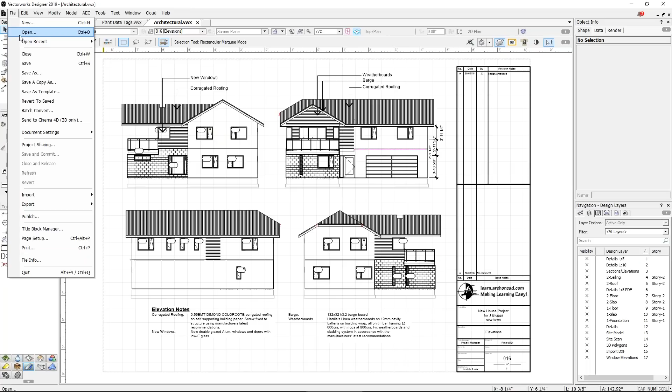So I'm going to talk about some of the best bits of Vectorworks 2019. I am not going to cover every new feature. There are some new features that are small, there are some bug fixes. I'm not going to cover the entertainment features, but I'm going to cover the features which I think are really quite powerful. And I'm also going to show you how to manage some of these new features. There's a new way of putting, for example, the tags on windows, and I'm going to show that to you, and I'm going to actually explain how you can take control of it as well.

But the first thing I wanted to talk about was the clip cube. Now, I hope everyone knows how to use the clip cube. We select a few things like this. I've got my clip cube here on my quick preferences. And if you haven't got it there already, it's this button over here, this arrow, and you choose Show Clip Cube. That will bring the clip cube preference up here to your quick preferences. When you activate the clip cube, it will put a clip cube around the selected objects.

So because I had the chair selected and these other things selected, it puts the cube, or the clip cube, around there. If I select the clip cube, I can then move it. I can change where it's going. I can also change the angle of it using these dots here. So don't forget, you can actually twist the clip cube to align with your building if you need to.

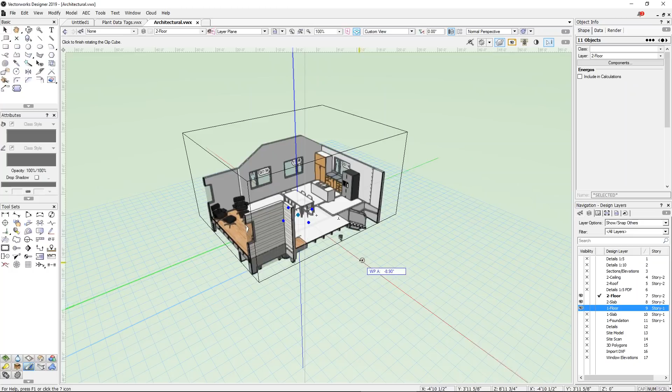And I want to bring that down so I can see my lower floor and turn on my lower floor as well. So I've got this view here, and I really like it, and I want to show the client because it's really important how the client will appreciate the room, the kitchen, the interaction, the organization between upstairs and downstairs. But when I try to make this into a viewport in Vectorworks 2018, it was actually very awkward.

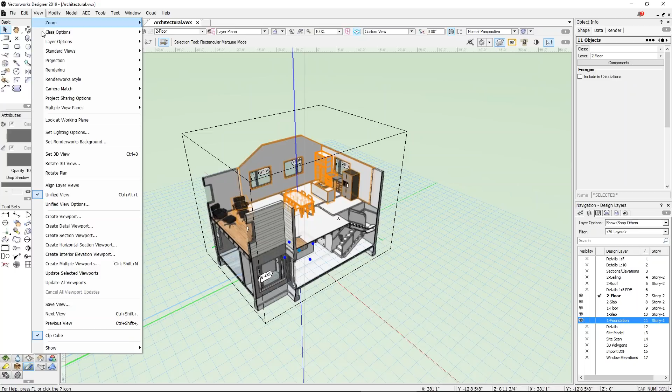In 2019, with that clip cube shown, I can go View, and I can choose Create Viewport, and Vectorworks will use that clip cube to help create my viewport. Now I have a layer already for this. Let's go OK, and there is my rendered view.

It's not actually rendered yet. So when I update that, you should notice the entire building disappears and we're just left with the bit that is the clip cube, which I thought was pretty cool.

I reckon this is going to be a fantastic way of helping clients understand what you're talking about with your spaces, because you can hide all the spaces except for the bits you really want to show.

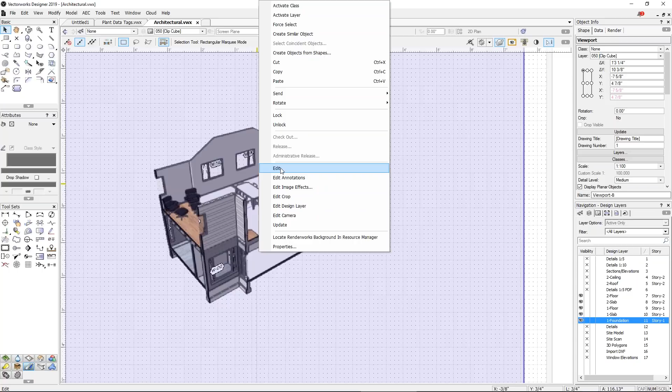If we right click and choose edit - normally I go straight to design layer, but I want to show you something on the dialog box. When I go to edit, this is the normal edit window, and for most people this turns up when they double click on a viewport. It doesn't for me, because I've changed this option here, since I quite often edit the annotations. So later on you'll see me jump in and out of viewports without bringing up this dialog box, because I've activated this option to edit the annotations.

Anyway, I want to edit the design layer, but first I want to activate this button here, navigate back to the viewport, and display it with the clip cube.

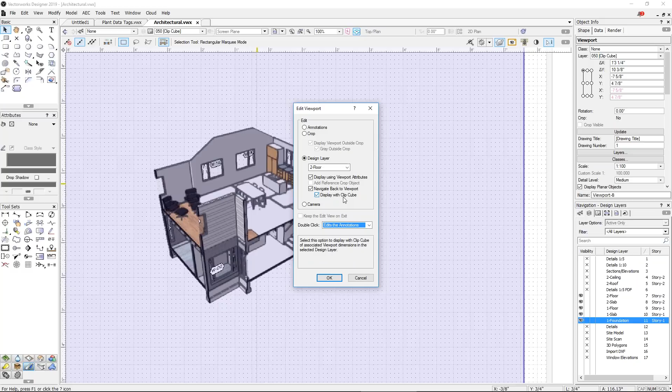OK, that takes us back to our design layer. There's our clip cube, and we've decided we'd like to show more of this end of the building so the client can appreciate how this is going to work. We're going to pull this down so the client can really see the indoor-outdoor flow.

Let's return to our viewport. Now I'm going to update that, and my view should update, and I should see my new revised clip cube.

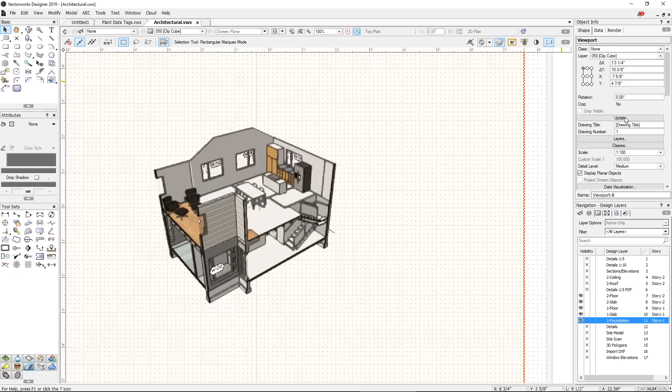This is a really nice way to avoid having to crop this viewport - the clip cube does a lot of that for you.

If you still want to crop the clip cube viewport, you can do that by going edit, crop, and then draw a shape that you might want. Let's draw a freehand shape, because we don't want to see the downstairs very much.

And there it is - you can still use the crop, but the clip cube does this three-dimensional cut, which is actually pretty cool.

Now, I think I've actually changed this on my computer. You might also notice that this is slightly fuzzy.

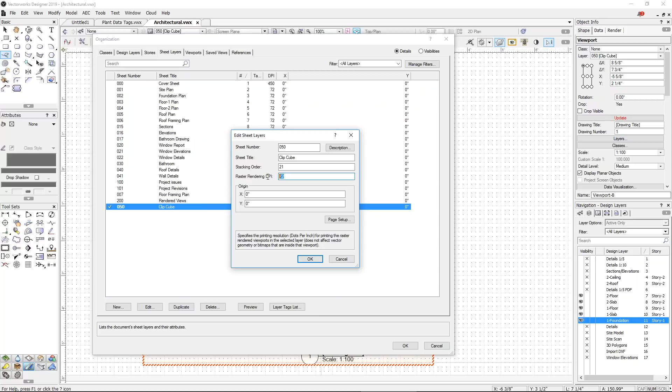The reason it's fuzzy is because when I set up my sheet layer, I didn't change the raster rendering. So if I make that 300, OK, and then update my view, you'll see that my rendered view comes out a lot crisper.

Just have to wait for that to finish. There it is - so it's a lot crisper.

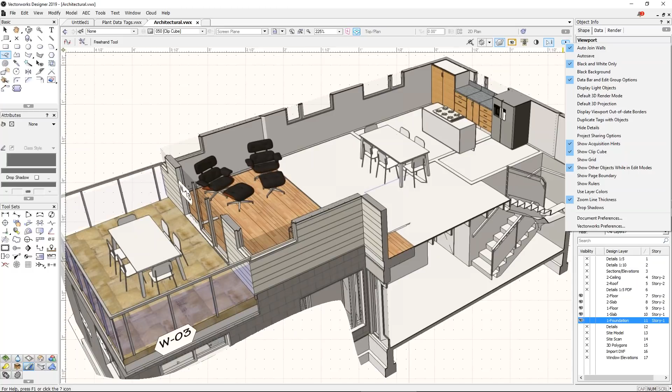Now, you might notice that my clip cube has the gray fill on all of my clip cube objects. Let's have a look at this - it's down here, Vectorworks Preferences, and we're looking for Interactive and Interactive Appearance settings.

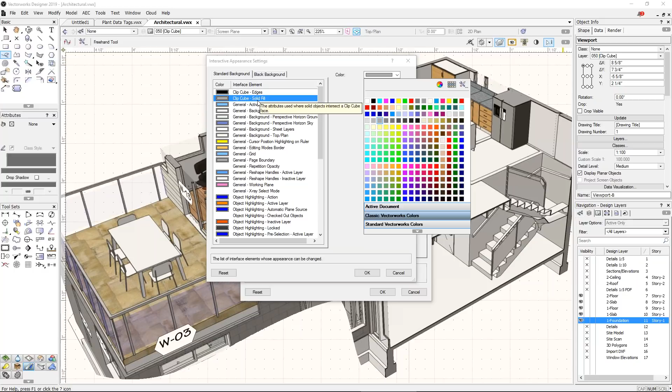So there's an interactive appearance setting which I've changed, this one here. This is normally a bright red color, so all of your clip cube edges are red, and I've changed it. It's one of those little subtle changes you forget is in there, but it lets me change my clip cube edges to a nice gray color instead of that rather bold red.

So I think this is a big improvement, this ability to create your clip cube viewport, which I think is pretty cool.

So let's go to something else that I want to cover.

This viewport here, I'm just going to do something to this. This is a viewport which I've set up - it's a rendered view. I've got two views of the same part of the building, and I'm going to turn off the image effects.

The image effects allow you to change the exposure, the color temperature, the shadows, and the highlights - the edges of your rendered view - much more easily.

So let's just have a look at changing this to a Renderworks style. I'm not sure if I've got a fast one. Exterior fast - maybe this one will do.

And we'll just update that, because this will work on several different rendering types. So let's get that one updated. You might notice it takes a little while to update.

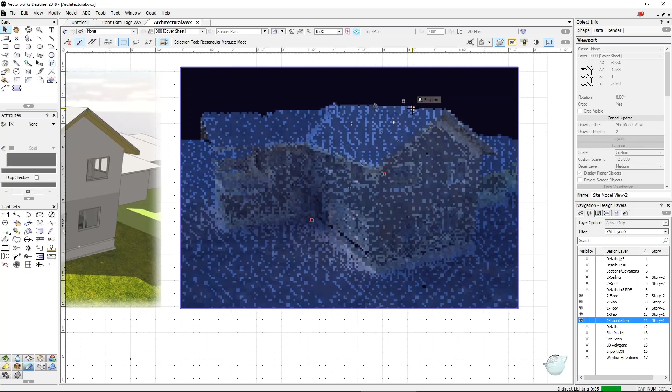Then if we wanted to change things like the color temperature, the exposure, or add more lights, we would normally have to go back to our design layer and add more lights to it. But what we tend to do is add more lights, come back to our viewport, and have another look - is that what we wanted?

Yes, no, go back to our design layer, change the lights, change the temperature of the lights. That's a lot of work, and you can waste an awful lot of time.

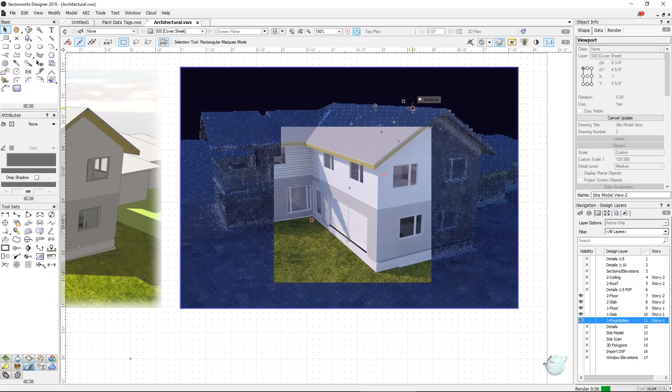So when this finishes, I'm going to show you how you can change this and make it much quicker. On my object info palette down here, there's an option to apply image effects. The image effects will allow us to change the exposure, and you'll see it's really, really quick. I'm just going to be quiet while we wait for that to finish. It's nearly done.

All right, Barbara, so it's getting there. I can't do anything until it finishes. This is my image effects button here. I know, but it looks okay, great.

So there we are. Let's have a look at our image effects. If I turn off the image effects, you can see there's a slight change. Let's turn that back on, and let's have a look at our image effects.

Now what I can do is play with my exposure, and it's instant. Play with the contrast, play with the highlights, play with the shadows, or I can reset and bring it back to normal.

So if I go reset and apply, that was the standard image effects. Then I can click on this again. I'd actually like to drop the exposure down a little bit to show a little bit more light and shade, and I want to have a bit more contrast.

I'd actually like to make it a little bit warmer, the color temperature. Or why don't we just make it black and white? Or increase the saturation so that the colors become much brighter.

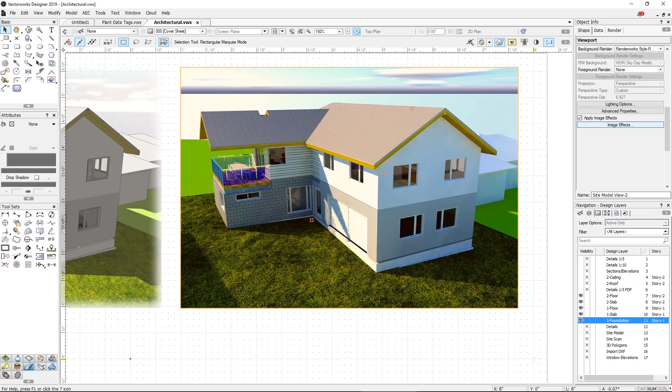You can see I don't need to update that viewport. That change is instant. It's not beautiful, I understand that, but it is instant, and it means you can quickly change your renders without going through the whole process of going back to the design layer, back to the render, back to the design layer, and so on.

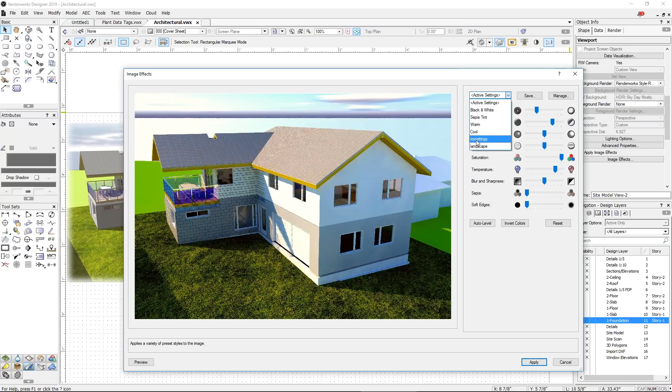These are also saved. So if I go back to image effects, I can save the setting. Here's one I created earlier, landscape, and apply that. So I've changed this.

Now this one, so there it is. It doesn't have to re-render, but that's a setting that I saved earlier. I can just choose it, and it's applied straight away to that.

Now those settings are not saved in the file. The settings are saved on your computer, probably in your user folder. I don't know for sure, but I suspect it's in your user folder, which means the settings you save on this computer will be different from the settings saved on another computer, unless you're using a shared area. But my guess is it's probably in the user folder, I just haven't looked at it.

But I thought that was pretty cool, that ability to have these rendered views and to change the color temperature. There's a huge difference between these two.

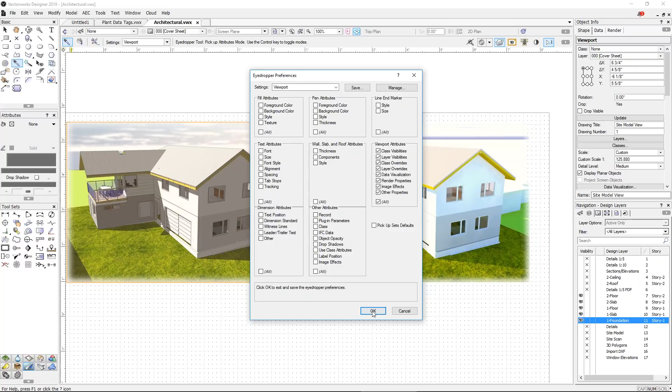I don't know if you noticed, but they actually did start out as exactly the same rendering, and I've just played with them. The Eyedropper tool now has the ability to suck up the image effects from one viewport and stick it onto another. So you can suck up that, stick it on that, and it should change those two viewports straight away. Those are two things I thought were really quite useful - a real increase in our graphic presentation, speeding up the way we work, and I think they're really cool.

Now, those of you that know me know that I've got rules about classes and layers, and not having classes or layers that I don't really need.

So Barbara, let's leave that image effects. We're moving on to another topic. There's a couple of questions.

Can you save the settings for new renderings? I think I've already covered that one, that's saved on the computer that you're working on. And the image effects - if I save it and a colleague of mine opens it on another computer, he will see the same rendered view, but he won't see it as a saved setting. But he can save that setting on his computer if he wants.

Okay, let's have a look here. Now you might notice I have a lot of classes, and it's actually kind of a challenge sometimes when I'm looking for a particular class to scroll down through all of these. Now I know if I was doing revisions, I could click here and hit the letter R and scroll down to the first R, then the next one, so it's stuck there.

But there's a new thing in Vectorworks, and that's the ability to search. So if I type REV, you'll notice that it doesn't just scroll me down to the area where those revisions are. It actually filters out everything except classes that start or include the letters REV for revision. I'm just too lazy to write the whole word, and I don't need to, it just finds them.

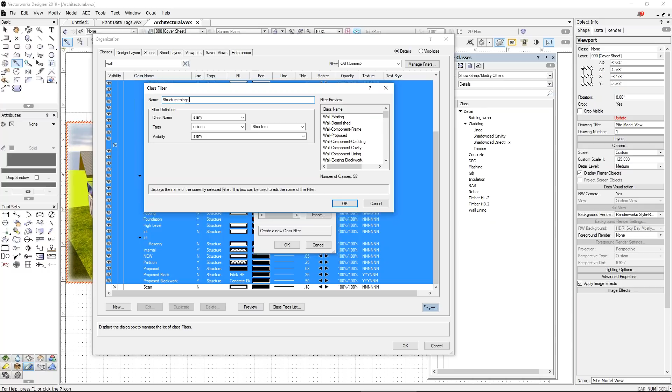So now what I can do is I can create a filter. This is a new structure filter, and this structure filter is not going to look for any classes. It's going to look for a tag that includes structure. So this will pick up walls, it'll pick up structural objects, it could pick up doors if I want to add those, and structure things. So now I've got this extra filter. That's the strategy behind that.

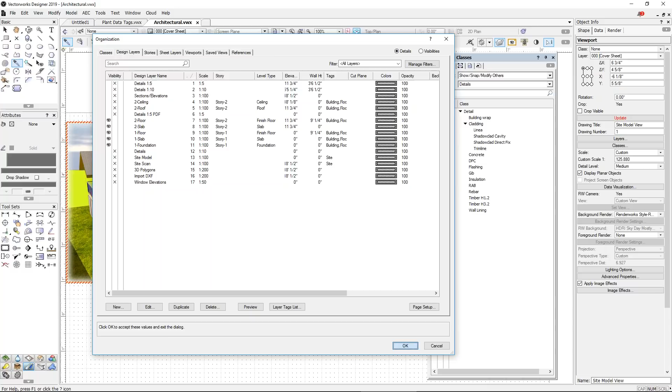Now you can also do the same thing with layers. We can add tags to layers, so when we assign tags, we can pick them from the list. I've got some here for site, building, floor 1, floor 2. So if I want to, I can filter my layers and go show me the ground floor, and it just shows me the ground floor layers. I just don't have enough layers to make it worthwhile, that's all, but classes, I really need more control over. So now that I've done that, I should be able to click here and go structural things, and you can see I've got balconies and floors, and I can work on my entire building, but I can turn off everything that's not structural.

Someone's asked if the tag and filters within your document save on your computer. I can't remember, I'm sorry, I'll have to get back to you on that one. I don't remember whether it saves it in the computer or whether it saves it with the file. I guess there's an easy way to find out.

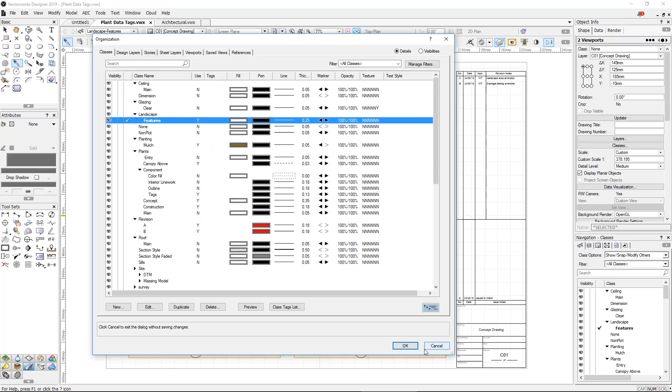Let's just go to plant tags here, and we'll do a quick one on this one. I think I've got a feeling it might just be the file. So let's create a tag here, assign a tag, select from the list. You can see this list is empty because there aren't any tags in this file, so it saves them in the file. So the idea would be, if you've got a file, put these tags in your template. Build your template out of one of these projects that you've done it, so that those tags are actually in your template file.

So I just think this is going to be extremely useful, this ability to have these tags, because as you saw, I have loads and loads of classes. And so I want to deal with walls, I want to deal with doors, I want to deal with details, and it just shortens my list, so it's much easier for me to find the things that I want.

Now, the layering and class filtering is quite useful, because if we go on to my sections, I've got a section here. So here's a section through my building. Now they've made a change to the sections in Vectorworks. There are two parts to this. There's the section that they've changed, so this is a section viewport, just a standard Vectorworks section viewport.

But they've also created a new section viewport, which is a horizontal section viewport. Now I haven't got one to show you, but I'm going to show you through the section viewport what the sort of changes are likely to be. Now the reason I haven't got a horizontal section viewport is I haven't got a building that actually shows it really well, so I just didn't bother making one. But what I'd like to show you is what changes they've made to both the horizontal and vertical section viewports.

There's a new tick box here at the bottom of your object info palette to display extents beyond the cut plane. Now I think this was already here, but this new one is to display the extents before the cut plane. So if we have a look at this section here with the handrail running through it, that handrail is actually the other side of my cut plane. So let's turn that off and we'll update our viewport.

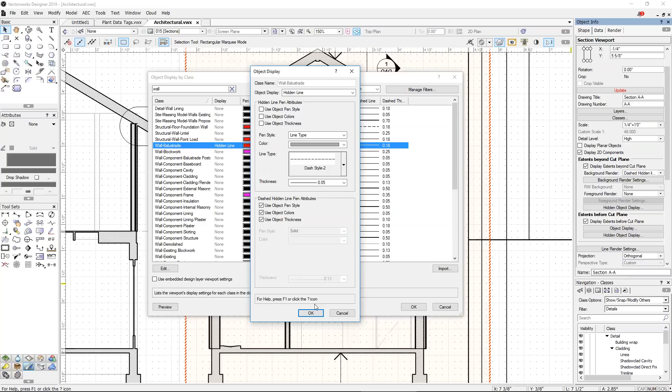I'm going to do the same for the dashed hidden line as well. So we're going to do line type under there, and this line type is going to be dash 2, and the thin line again.

Okay, now I'm going to update my viewport. And now you can see I've got my dashed handrail that's behind me, now visible, which I think is going to be a really cool trick, because there's lots of things that you'd want to show people so that you can check the heights of things, you can check the way things line up.

It's going to be kind of a neat trick, but you don't want to show everything that's behind you. You're going to be able to show things based on their class, which means you need to be very careful about the classes you use, because if you're not, you're going to have things showing up that you didn't want to see.

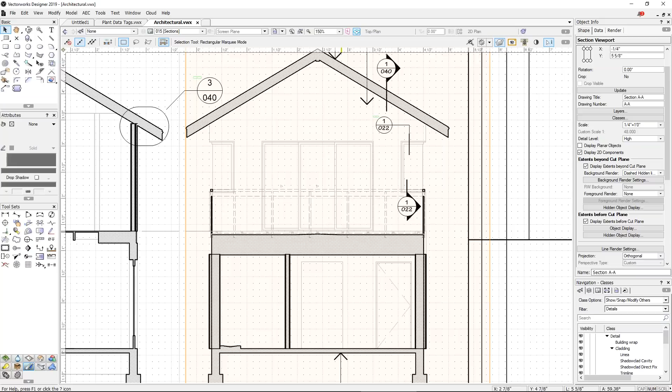So are there any questions about that? Because that's going to be quite a powerful trick.

Now, when you first try this out, don't be surprised if it doesn't make sense the way things are working. It took me a little while to get used to turning the class on, setting those options, and then updating the viewport to make sure that they turn up.

If you've got things that have got multiple classes, for example, if you've got door objects that have got a class for the overall door and a class for the components of the door, you have to turn all of those on in order to see them.

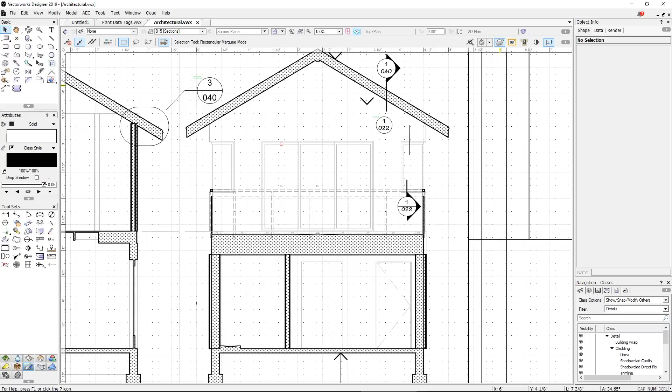Actually, Barbara, I'm quite surprised. I thought we were going to have quite a lot more questions about that.

So in simple terms, what is a horizontal section? The reality is, John, that the horizontal section is very similar to your regular top plan. It's just that you're going to have the ability to create those extra options. So I'll try to make one. I just don't think you'll see much difference, that's all.

So floor, there's my floor 1. We're going to go view, create horizontal section viewport. So this is what it looks like, John. It's a section viewport, so it looks like a section viewport.

We can name it, we can put it on a layer, we can choose the extents. But this is where it becomes a little bit different from a normal plan viewport. And that is that we have the ability to display the extents below the cut plane, and also to display the extents of objects above the cut plane.

Now, I thought it would be quite handy if we could call it, sorry, I was just looking at your comment, a plan section. Yes, John, it's exactly what it is.

Now, I thought it might be good for reflected ceiling plans, James, but Vectorworks said that wasn't their intention, I think that's what they said to me. But I think that's one of the things they're going to make easier, to make these reflected ceiling plan type things. At the moment you can certainly try it, but you need to have classes.

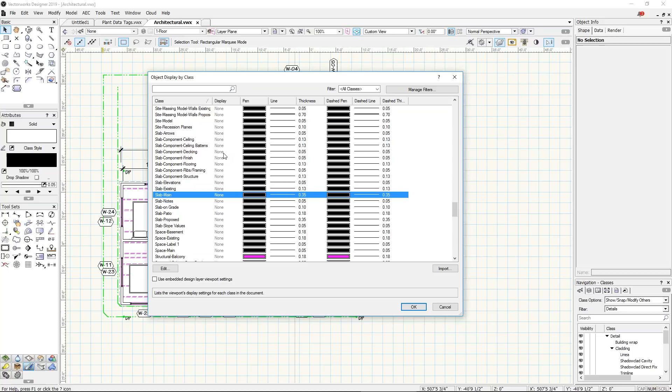So again, we're going to use classes. I'd have to make sure I've got tight control over these, and I'd want to turn my slab on, the slab existing. And then, James, I've actually got the problem where maybe I've used the same class for my slab above as my slab below, and now I need to be careful about my class structure.

So it should give us more power over the section, the horizontal plane. We should be able to control exactly what elevation it's cut at. Let's have a look at advanced section properties. Display, that looks the same.

As I said, I don't have one that I can show you that I've actually thought about and calculated accurately. But James, if you just have a look here, it's got a cut plane elevation of 4 feet 11 inches relative to the first floor. And I can change that and make it 1500 millimeters, which is probably what it was, relative to the story first floor.

So I can actually choose where it's cutting through. And because I'm choosing where it's cutting through, as I said, I still need to play with this, but I would hope that you can then control which windows and doors are visible in the cut plane, so that clerestories do not show up in your plan view, which would be really cool.

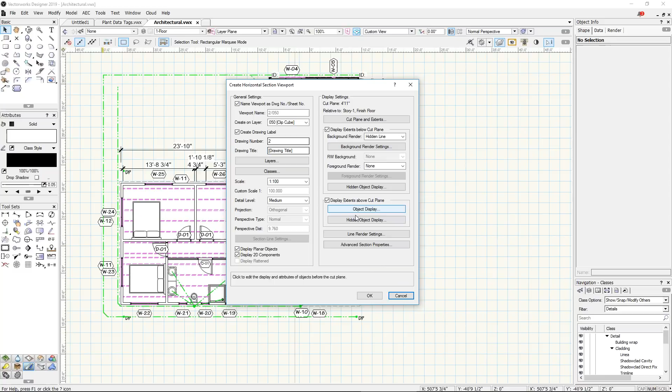I think my own personal feeling about this is that the horizontal section viewports are going to be our plan viewports, but we need to learn how to use them really well. Because of these options here, and because we can have the extents above, and all these different display options, I think it's going to take us a little bit to get used to it, that's all. So let's cancel that.

I would like to look at a brand new blank file. So, a new blank file. One of the things that comes up with me quite often is I import information from other people - surveyors, details, manufacturers, that kind of thing. So what I need is a file that I can import, and it's over here on my other screen.

So I'm going to drag the survey file into Vectorworks. There it is there, that's my survey file. Now this dialog box has changed, and the DXF and DWG importing changes just about every version of Vectorworks - they keep constantly improving it, which is really nice. So we think that they've detected units which are meters, which is correct, since it's from a surveyor.

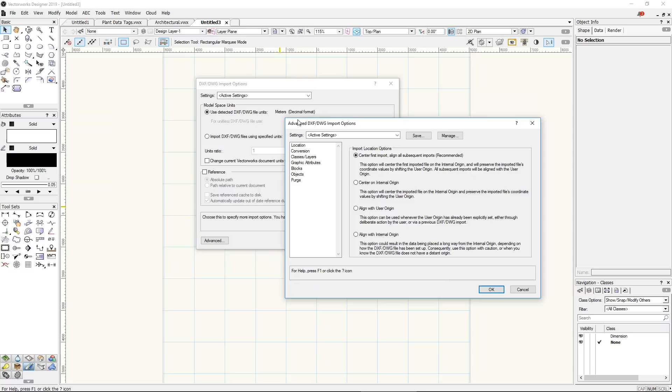Let's look at our advanced options. Now, the location is different. So this advanced button here is, I think, new, because this new screen is brand new. Our location, that's the same as it was. Conversion, that's the same as it was. We're going to fit this to 1 to 1,000.

Layers and classes is not the same as it was. Now what we can do with Vectorworks 2019 when we import is we can actually choose a mapping set, so that we can say I want to take the layers and classes from the surveyor and I want them to go into the classes that I'm choosing. So I'm going to choose their layers are going to go into my classes.

Let's manage this. So what you might notice is that these are the DXF layers that the surveyor has given me, and these are my choices.

Now someone's going to ask me where it stores these, and I haven't checked. So I think it might be on my computer - I don't think it's in this file, because this file's a brand new blank file. So probably if I go to my other Macintosh, I'll find that I don't have the same mapping set available.

So let's go to none. So that's what I would have got - in other words, I would end up with all of my surveyor's classes imported into my file.

Since I've got one here, let's try that one. It's only going to control one of those. I've got another one here for my survey, and it controls all of them. And so I've got this building survey here coming out on the none class.

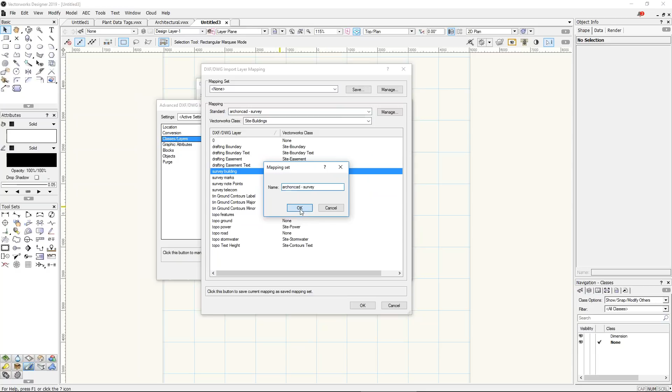So I've now resaved it, so now my buildings should come out on that class. Let's go OK, and we're going to go OK again. So that should have imported my stuff correctly.

We should notice on my navigation palette here that we actually have none of the surveyor's classes, we just have my classes. I think this isn't pretty, it's not amazing, but it's a really useful, powerful feature. We always had this ability under tools to use class and layer mapping, but I think a lot of people found that complicated or confusing, whereas importing it directly into your saved set is going to save you a few steps. It's nice and easy to remember, and I think that's going to be a real benefit. So not a wow, but really, really useful.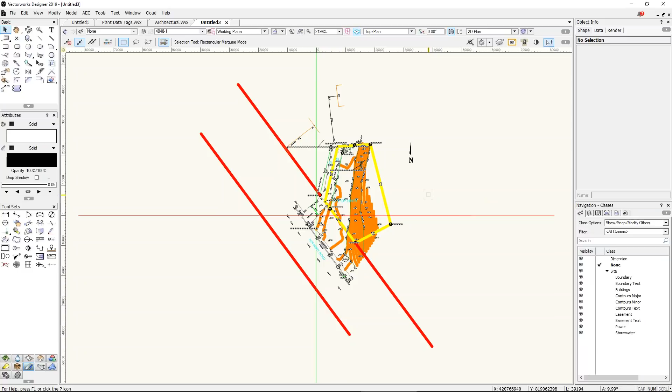Let's go back to my architectural plan. I'm going to have a look at a bathroom drawing. There we are. So there's my bathroom, and it's using internal viewports, and I've got a toilet here, and it's now showing the 3D view of the toilet. Not only is it now showing the 3D view, but I can choose the level of detail that I'm showing. If I choose high level detail and update that viewport, we should see extra information on that toilet seat. So you can see there's the toilet seat. I've now got this detail level when I create viewports as to what I'm going to see. Do I want to see high level detail or low level detail of information?

And what Vectorworks have done is to make a massive change to the way we work with symbols. I need my resource manager, and I need to find that toilet. It's a Duravit toilet, it's this one here.

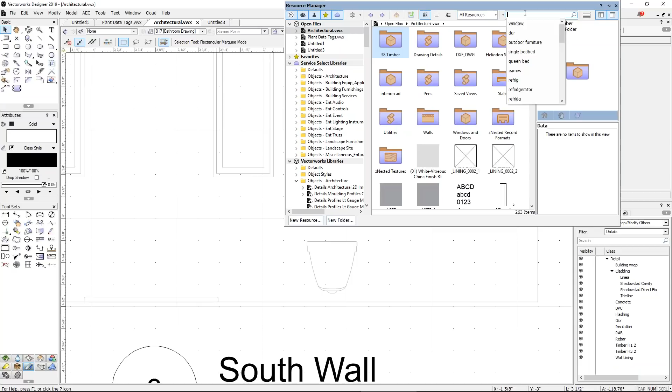Now, I think most people are familiar with the concept of hybrid symbols in Vectorworks.

So let me just, there's a couple of questions here, Barbara. Let's just go back over these. Does the cut plane only work in stories? I don't think it only works in stories. If you've set your file up with stories, then it certainly will. And if you have no stories - now the file I showed you actually uses stories, so I can't show you a file without - but I suspect it will work regardless of whether you use stories or not. But the file I showed you, because it had stories, could give you the cut plane elevation relative to stories.

Are the attributes of the imported layers put into classes, or do they keep the original attributes? I'd actually chosen to leave the original attributes, but I could have mapped them all - I could have mapped their line weights, I could also have mapped their classes. That hasn't changed in Vectorworks. And for the classes that I created, I don't think it automatically chooses the graphic attributes of each class. So I think when you import it, it won't automatically do that, but later on, once you've imported them, you can actually go through and set those attributes yourself.

So let's go and edit this toilet. So what I was talking about was the hybrid nature of symbols. I think we're all familiar that you've got a 3D object and a 2D plan view, and so when you're in a 3D view, you see the 3D view of the model, and when you're in a top plan view, you see the 2D part. That's all going to change.

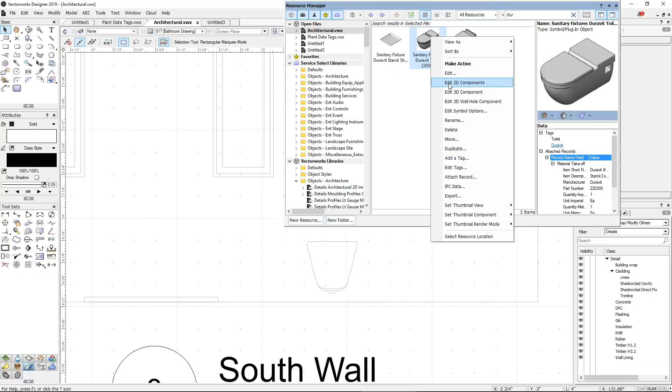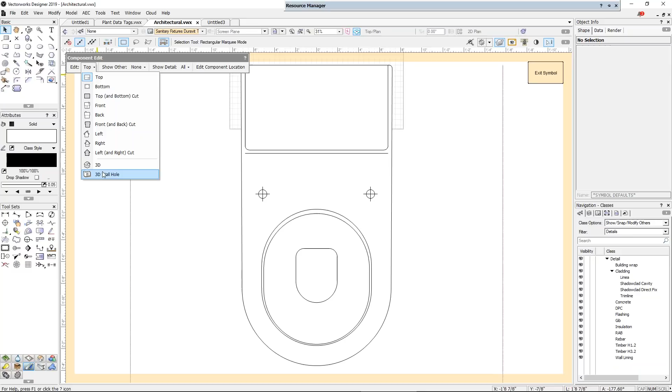We now have the ability to have a 2D part in our top view, our bottom view, our cut top and bottom, our front view, back view, left, right, and so on. Now, there is a lot of work if you wanted to put all of these in. There's no doubt, I've only done the front view.

So there's my front view object. I think from memory there's a little bit of a line there which I was a bit sloppy with. Let's move that across - that line and that line should be visible, not when we're on low view. Do I want that visible in a medium view? No. This one here should be visible in a medium or high view. This bit here should be visible in a medium and high view, and this one only high. We'll make that one high only as well.

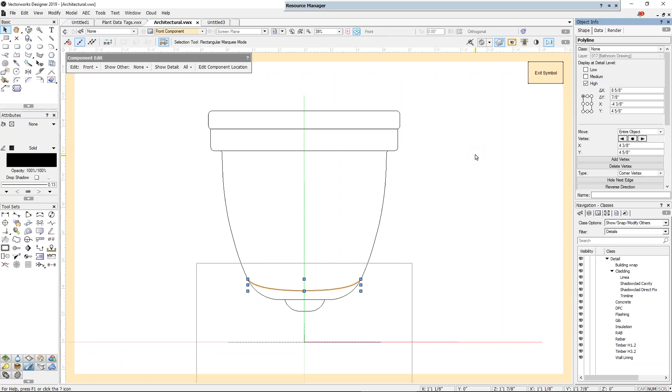So now what I have is an ability for all of my objects to choose when they appear - do I want them to appear in low detail, or do I want them to appear in high detail?

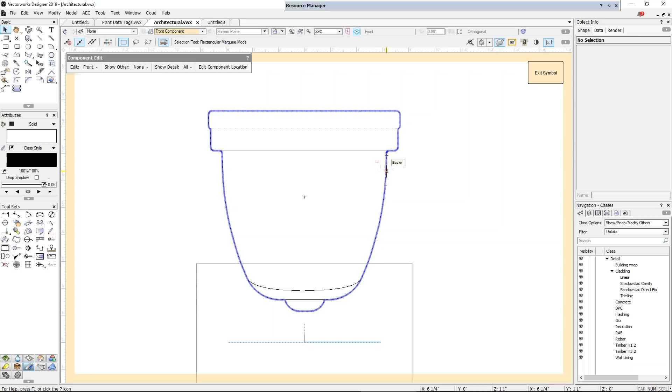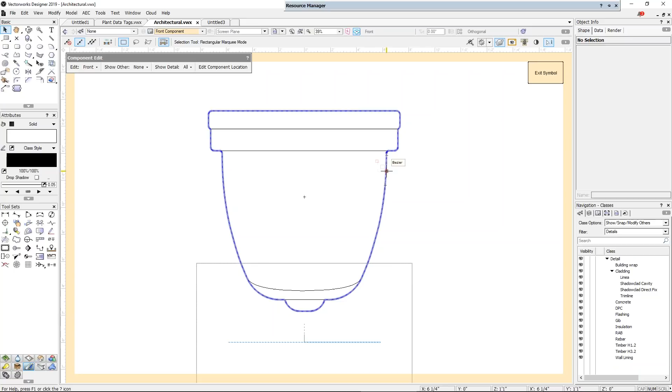So if you're a landscaper, let me give you an example. Let's say you've got a picnic table and a site plan at 1 to 200 scale. You might want that picnic table represented by, say, 3 rectangles. But when you get to a 1 to 50 plan of a hardscape, you might want that picnic table represented by each piece of timber. So you can choose to have an outline for low detail - at 1 to 200 you have low detail - and when you get to the picnic table you want high detail, so you turn all of those on.

Let's have a look here. If I look at my toilet in low detail, that's what it looks like. If I look at it in medium detail, it looks like that. And if I look at it in high detail, you can see I've got extra lines.

Now you might wonder how you're going to draw this thing if you don't know what the background looks like. So here I can see the 3D view - just takes a little while, but there it is. So I can trace over this, or I can use convert copy to lines, but I traced over it to create this outline. Let's have a look, and let's just undo that.

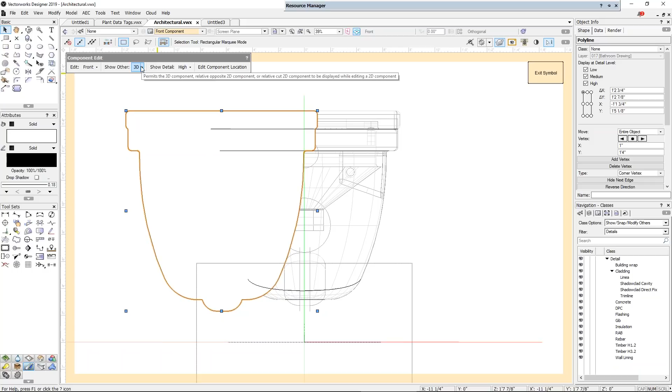What I'm going to do now is go to, do we want a left and right cut? Now I don't think I've got anything for my left and right cut, so even if I show it, there's nothing there. There it is, so it shows my toilet. And if I showed 3D, there it is. So I could trace over this and give it a solid fill so that when I cut through the toilet, I can create just a solid fill through that.

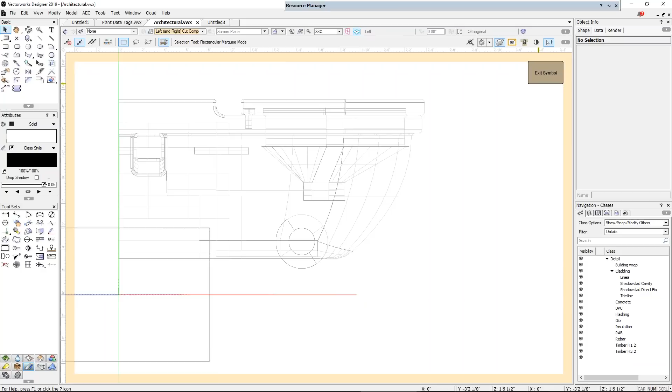Anyway, I only did the front view for this. So exit my symbol. Let's update that - low detail, medium detail. I think I've undone all my changes. And high detail. So let's update that. So there's my high detail, medium detail, and so on. I think that's going to be a really nice technique when you're cutting sections through the building to have these different levels of detail that you can show for different scales of work.

And they are related just to the viewport. So if I drag a copy of this across here, let's make this one 1 to 200 and update it. Now that's in the way, let's get rid of that. So there's my toilet, and this one here we might want to have high detail, and this one over here we might want to have low detail. And that would be my strategy - you just add the things to the objects that you really want to use in this way.

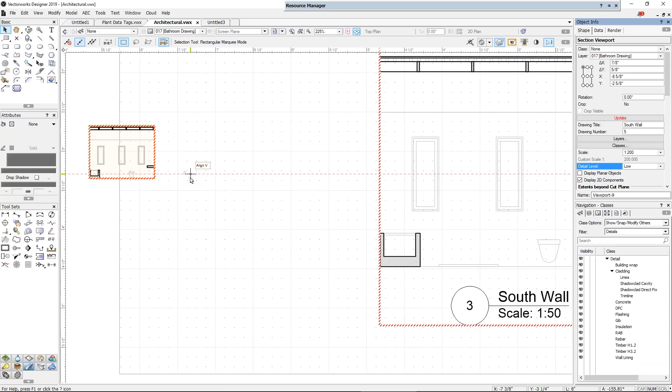So I thought that might create some questions, but it appears not. Cool, so we're going to move on.

So what's another thing that we need to talk about? Let's have a look at my elevations. So when we elevate a building at the moment, we can turn on our tags.

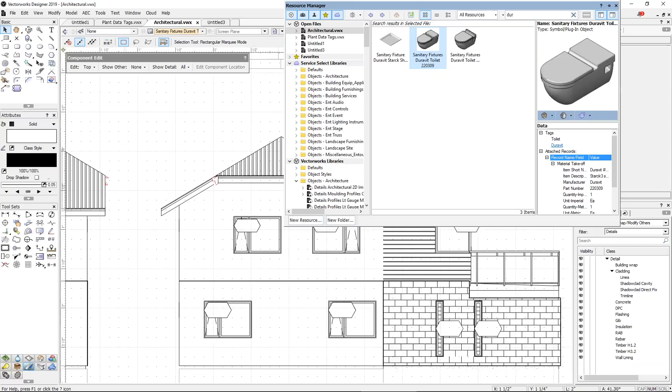Can I show you how to automatically generate the 2D from the 3D? I'll see if I can. So let's try doing a left view, shall we, and 3D model. Left, 3D. Let's see if we can see everything.

This one already has it built. So this one's already been built - I don't know who built it. This was one of the standard Vectorworks objects, and it's already been built for me.

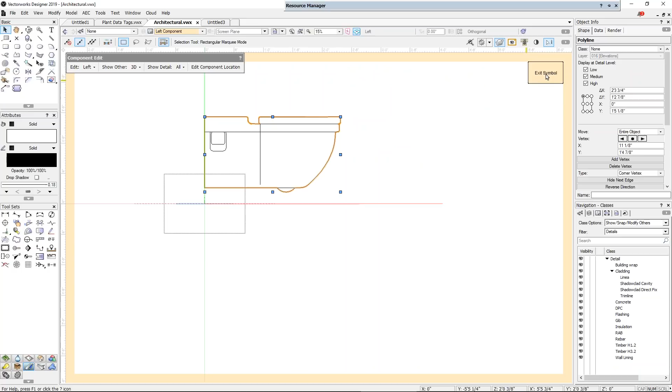So can I automatically generate it? Let's just delete that. And edit component location, show detail.

So I'm not sure whether the Create Auto Hybrid is going to do this for me. See, Create Auto Hybrid's not there. Oh, there it is, sorry. Right click away from everything, generate 2D from 3D component, wireframe, hidden line rendering. Let's see what that gives us. So that's given us its best guess.

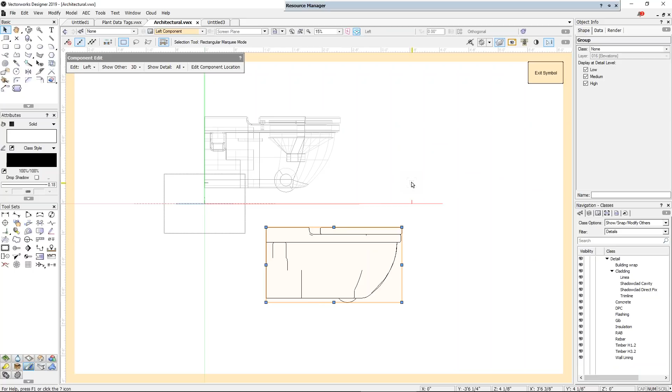So that would be one way where you can quickly generate the line work from the 3D symbol. I'm going to undo all of that because I want to put everything back, and exit the symbol. So that's how you can do that.

Automatically generate the 2D - yes, William, I've done that. Do you know if Vectorworks have made symbol to have the details? I'm not sure I understand. Luke, I think I've answered your question.

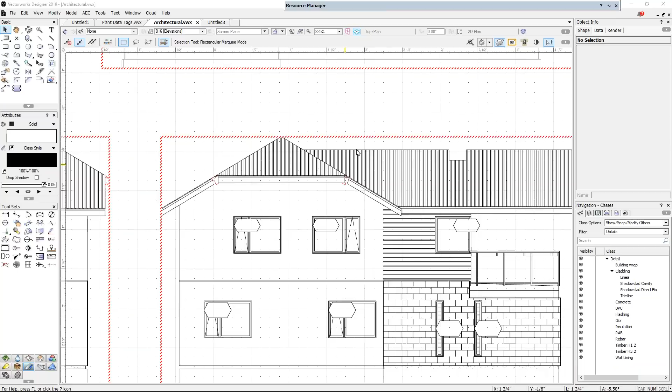And there's one question: do you know if Vectorworks has made symbol to have the details? Some of them have got the more details, some of them haven't. Okay, so let's move on to another topic.

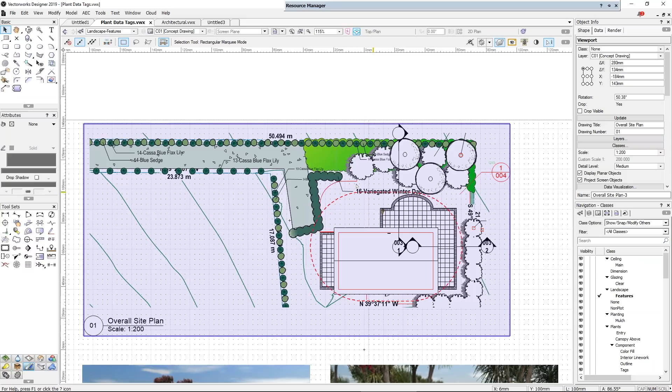In order to see them, I've got to expand my crop area, which means it takes over my drawing. I don't want to see the site underneath and so on. So I'm going to turn those plant tags off, that one there. But the other problem is when I make the tags readable for that particular drawing, when I come to my next drawing, the hardscape plan, the tags are now too large and they're in the wrong place, so I can't see them.

So what we need is a technique that will allow us to tag the plants when we want and pick up the information from each plant. If only there was a tool.

Well, actually, Vectorworks have created this new tool. It's called the Data Tag Tool. And this Data Tag Tool is going to replace things like there used to be a tool for putting the date and the time on things. It's going to be used for putting window tags on elevations. We can put landscape tags for plants. We can use a tag for hardscape areas. It's really cool. So let's enter my viewport.

Now you notice I told you before, I'm going to double click because I've already set my preferences, and I quickly jump into my viewport. I'm going to use my plant, or my data tag tool, and now I need something to look for plants. So Vectorworks have given us a whole lot of tags already made. Let's just scroll down. There's one here for plants, and I want to use this one here. So it's going to give us the quantity in the circle, and it's going to give us the common name and the Latin name.

Okay, so we've got a couple of options here: label mode, single select object - this is the one I'm going to use. This is an important one. And this is the automatic, and this one will find all of the windows or all of the plants in the viewport. I don't want to use that one just yet.

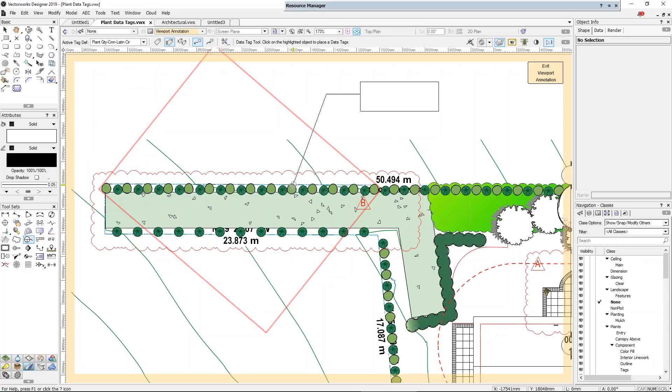I'm going to place my tag, and then I'm going to move towards my object. So that's where I want my tag. I'm going to move near an object, and I click. And let's change this because it's on the wrong class. Let's do that again. So click on that one, that's that one, click, and that one. And you'll notice that I've accidentally picked up the same two plants.

So I'm going to move that tag across there, but watch this. So I grab hold of the end of that tag, move it to the one that I want, and it picks up the other type of plant. So I want these to be maybe vertical.

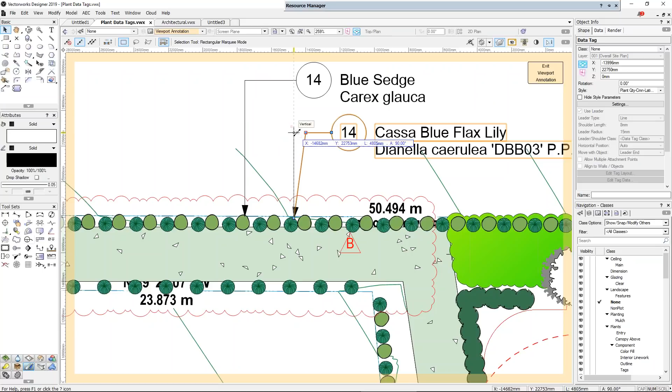I want that one to be vertical, and this one would be nice if it was vertical too. But the two tags don't line up. You can still use Modify, Align/Distribute, Leader Lines - this still works. I'm going to align the label point, so I can click, click, and it'll line those two up.

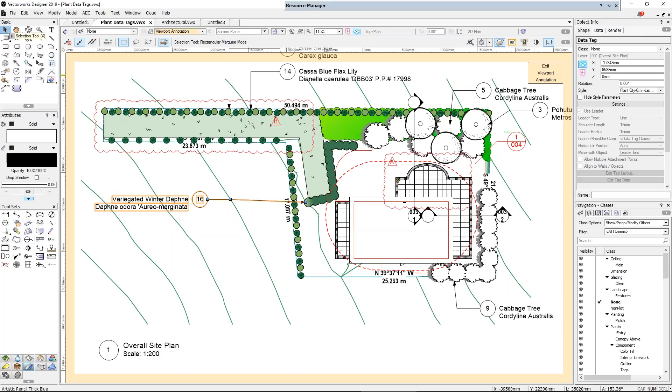So now I have this much nicer way of dealing with the tags in my viewports, putting them exactly where I want. If I want to tag other plants, back to my tag tool. I want to tag this one, this one, and that one. I don't know about you guys, but to me this looks real easy.

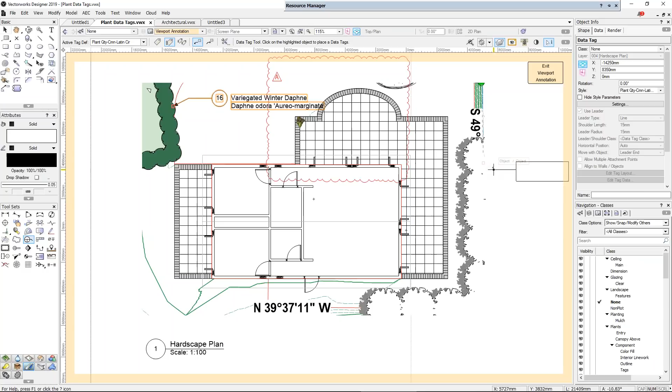Okay, so let's go to my next plan, which is my hardscape plan. Let's go into here and have a look. I'd quite like to show the client or contractor what these ones are that are around, and because I'm not turning on the tags, I'm going to use this one, and I can put that tag there, and I can put this tag here.

Then I can pick up my hardscape. So I can click here, let's find my hardscape tag, and I want to use that one, and tag my hardscape objects - tag that one, and tag that one. The neat trick is that these read the information through the viewport to the original design layer.

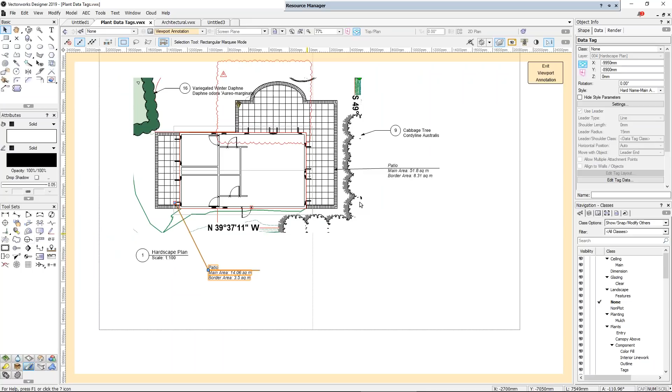If I make a change to these, they will update in the viewport. So someone's asked, how does the tag get the name of the plants? Because these are actual plant objects that have data attached, so they know the common name, the Latin name, they know the spacing, and we can make that tag report all kinds of different things.

So I'm going to go back to my architectural one, because I started off talking about the tags on windows. You'll notice that this elevation here doesn't have any tags on the windows, because I would quite like to use this tool. So what I'm going to do is place some window tags.

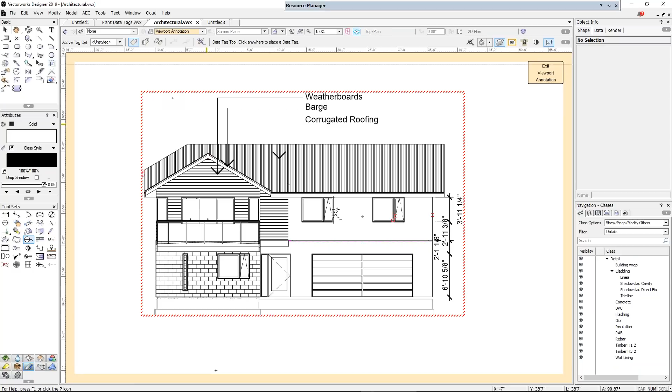I'm going to use my data tag tool, and I'm going to use this mode. I'm going to find a window tag - there's one here, I want to use the long one. Let's select that. So if we have a look, I can just move near a window.

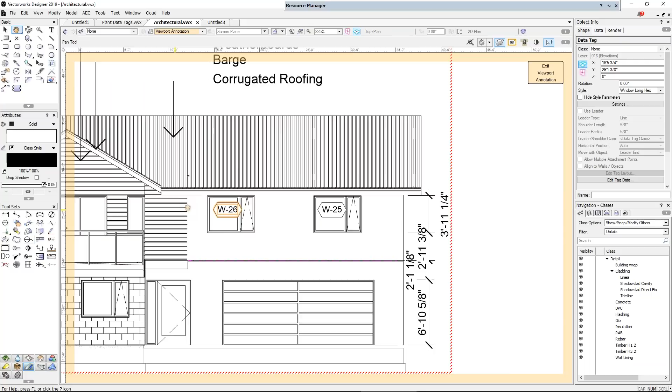You'll notice that window highlights in red. There's also one on the other side of the wall which also highlights in red - that's the tag for the window on the other side of the wall, and this is the tag for the window on this side. So click, click - just watch out which one, because there's a window on the other side of the wall. Click. So we can do it that way.

Now someone's asking, does the tag only work with annotation? How about layers? It works everywhere. I'm showing it in annotations because I thought that would be a great way for you to understand the power of this tool. You can't just use these in viewport annotations, you can use them in other places.

So you can use them on a design layer if you want. I've used a tag without a leader - it has no leader line going to it. So what I'd like to show you though is how we can take control of this tag and make it our own. Let's look here in architectural.

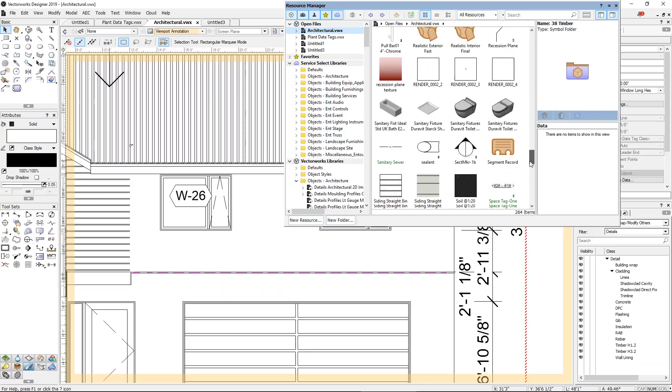There's a window tag, this one here - right click and let's edit that. So the tag is using what's known as a style. You might remember that if it's got this curving arrow, that the symbol definition is controlling the look of this everywhere in the drawing.

Let's have a look at editing our tag. If I want this to have a leader, I can turn the leader on. And because I've turned it on, these all have the curving arrows. The choices I make here will affect every tag here, so I'm not going to turn on the leader. Let's edit the tag layout.

So there's my tag layout, it's got a bit of text. I'm going to copy that text down here. We have here on the object info palette a new thing, which is to use dynamic text or not. I'm going to change this because what I'd quite like this to have is the width of the window times the height. Now I've turned off the dynamic text here, which means that when I exit the tag, all my tags will say width times height.

What I'd like this to be is dynamic text. So let's have a look here. Let's use dynamic text, and there's a button here for defining the tag field. So my tag field, what does it want to show? My tag field wants to show the width.

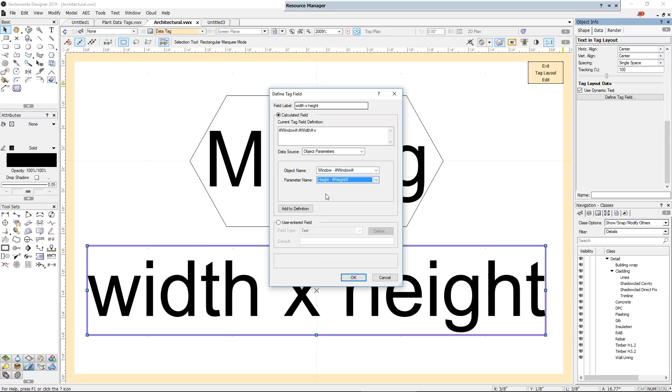Now, if you forget to click on Add to Definition, it won't work. Don't worry, I've already tried it, I know it doesn't work. Then I'm going to put a space, then an X, then another space, and now I'm going to look for the height. So I hit the letter H, height, Add to Definition. So now when I click OK, you don't see a difference.

When I exit this, you'll see it's picked up all of the sizes of all of my windows. And so it reads each window individually. It picked up the window number from the window, it picked up the size from the window. So you can choose what information appears on your data tag.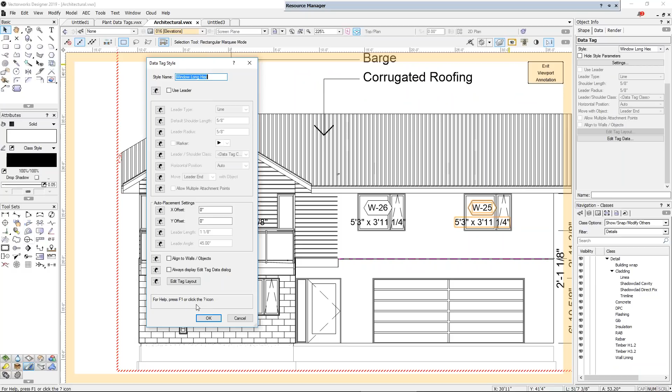You can also put classes inside that plant tag. So let's go back to this, let's edit this, let's edit our tag layout. And we'll change this and put on a different class. And if I haven't got one for this door, I've got a door text class. Let's put that on the door text class. Edit the tag layout, okay, let's exit our viewport.

So now what I should be able to do is choose whether that door text appears or not. Door text. So the door text has vanished. Turn it back on, preview it. It all comes back okay, and I need to update it to finish.

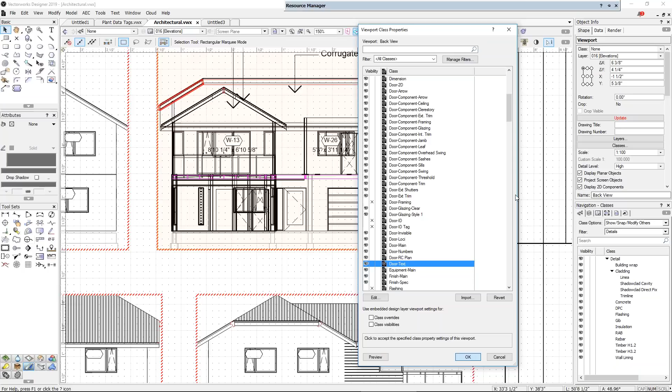So let's have a look at my questions we've got here. The tags placed in the viewport annotations - well, I'm pretty sure you can place them anywhere you want. This window tag, will it get the information from the object info palette that we give to that specific window without clicking on the tick show ID on schedule? I'm not sure I understand that - what do you mean by clicking on the tick show ID on schedule? If it should pick up the information on that window regardless, because I'm clicking on each individual window.

Can you also measure, for example, the glass surface instead of the maximum size? So you want to know the area of the glass. If that's one of the options you can grab from the window, I don't see why not. Let's go edit, let's edit the tag layout, let's copy that down here, and let's change that tag field. Let's delete all of those, and we want window - what's it called? Is it glazed area? Glazing thickness, glazing description.

Frame type - any of these we can use. I just don't know which one we might want, whether it's a clerestory, whether it's a 2D. I didn't see area - did anyone see area there?

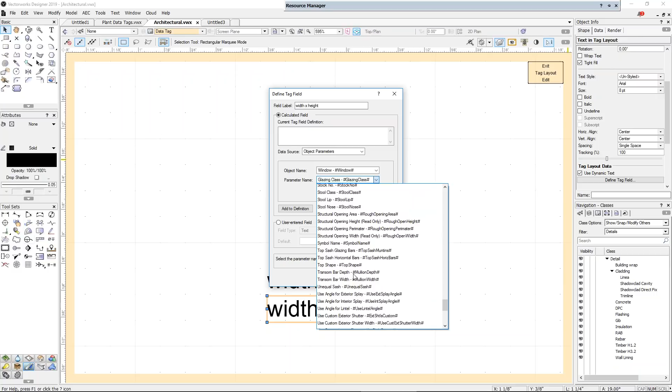Did I see sash glazing area? I don't think I did. But if it's in this list, I'm not going to look anymore for it. But if it's in that list, then you can do it.

Let's exit that. I think these are going to be really powerful because you can choose to put them on plans, you can put them in elevations. Oh, there was something I wanted to show you.

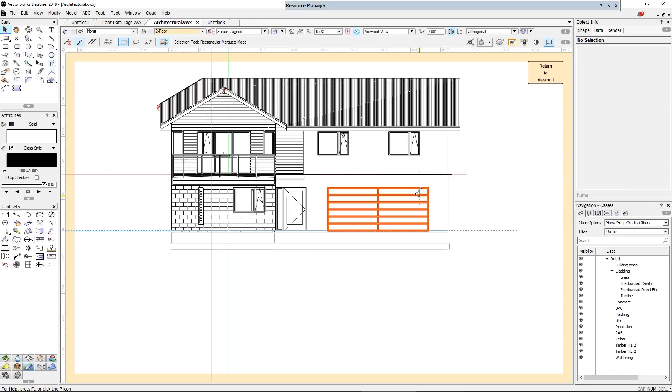Let's edit that elevation in place. So you know we can edit elevations in place, and we can do things like grab hold of this window and move it. I just want to move the window, not the wall. So we've decided it will look better if we move that window there, and that window there. When we return to the viewport, notice that my window tags have actually moved.

They're actually linked to the windows. If I change the window number, they will update here. If I move the windows, they will move here. So I think that's really powerful.

Let's have a look. So someone said in the past I could only do this through object data through a worksheet. Yeah, they really like it. I think it's really powerful.

Can you measure the glass surface? If it's there, sure. If you have tags in both layer and annotation, does this conflict on the worksheet schedule? I think it won't show up because the tags - well, the way you find a window in the worksheet is you say find objects with information attached. I don't think the information attaches to this object, I think it looks for the information and reports it. So no, it shouldn't do that.

Could tags be used to call out materials on the elevations by reading the wall cladding? I don't see why not, William. It's supposed to do all kinds of stuff.

Let's have a look at our tag. Now there are some wall tags that come with Vectorworks. Let's just have a look down here. There's a wall tag, there are different wall tags with leader. Let's choose that one.

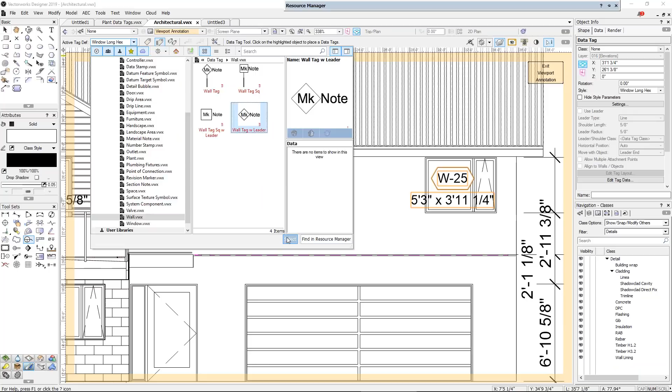And will it find a wall? Let's try it from here to there. Maybe this one won't work in plan view, in my viewport, but it should certainly work in my plan view to pick up the materials. I've only played with these on the elevations and in the landscape things.

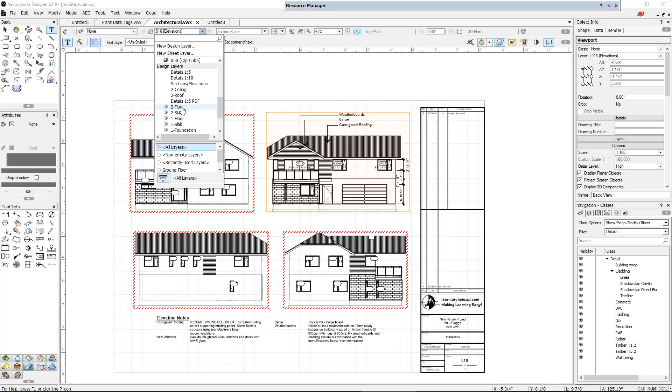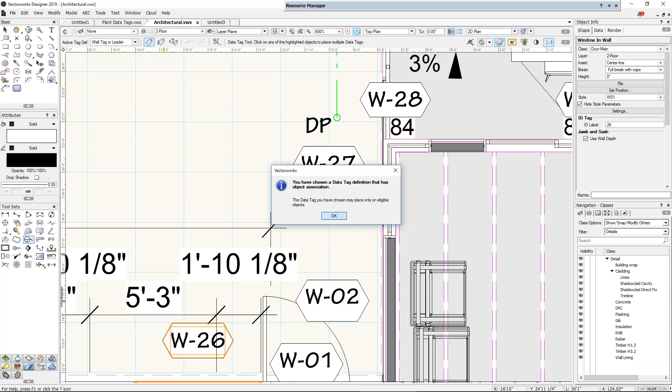Let's just have a look, see if we can find floor 2, plan view, and see if we can use that tag to grab that wall. Now it's a wall tag with leader. You'd think that it would find that wall for me. So it's got no object definition. So I've done something, there's something different I've done with my walls that's causing it not to show up.

I'm gonna go back to my window tag. Let's go back to this one here. And so I should still be able to do this with the window. I think maybe I've already done this with my windows? No, that's just the ID tag.

So I can now do this, and I've chosen this option here to tag all eligible objects, or do you just want to tag individual objects? So that one there. And if I had a different one with a leader, then I could choose to have a leader that went up to that one. You notice that's exactly the same tag as we had before.

So it's got that and it's got the width. I tend to make that the number and then the size of the lintel - that's just my personal preference. Call out materials - so William, I think there should be.

The ID tag in the object info palette. Flavio, we'll get the information from the object info. I didn't understand what you meant by the tick.

So if I choose that window there, I've actually created a style, and my style is W01, and the label - I've actually turned everything off on my window style except for the ID label. That's the only thing I can change. So if I make this window 30, that's changed to 30, that's changed to 30.

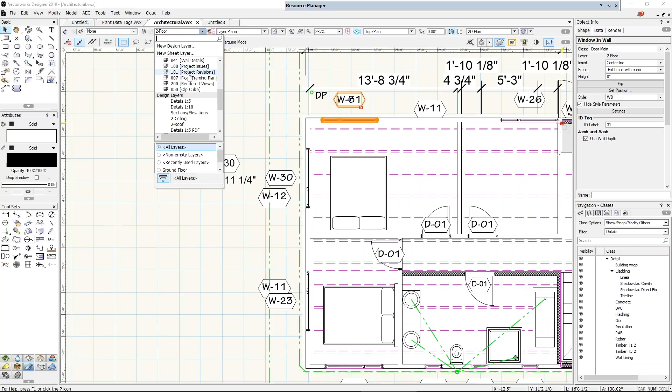Let's make this one 31 so we can see the change on the elevation. If we go back to our elevation, we should see that's updated to 31. And there it is there. So I think it's really cool.

And what's the next thing I want to talk about? The title block border. Oh yeah, this gets people all the time. And how are we getting on for time, Barbara? Are we going to run out of time? Oh, a little bit, but if I'm okay with it, if you're okay. A lot of people are sticking around. Nobody practically left. Well, then I'll make the title block border the last thing.

I was going to show you site modeling, but that has changed a lot - the ability to create berms and swales and site models.

And maybe, Barbara, we should just have a separate site model presentation.

It's a date. Okay, so let's just have a look at our title block manager, because one of the things my clients have talked about with the title block manager, or with title blocks, is revisions. How do we handle the revisions on this thing?

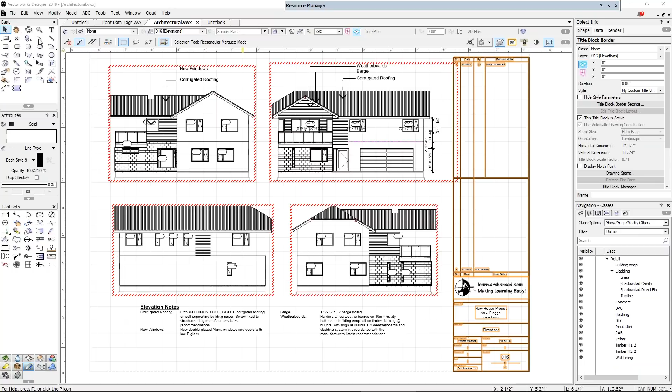So the title block manager, this is it here. It controls our project data and our sheet data, and this has been updated a little bit. So the change has been, those of you in Australia and New Zealand using the VAA title block, your title blocks will automatically be converted to this new title block border tool.

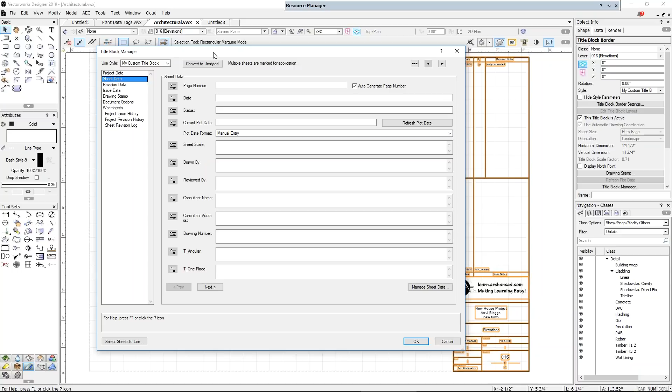So we've got the project data, the sheet data, the revision data. Now this is one of the ones that really catches people. Roger, I'm not sure if you've had a problem with this one, but let's have a look.

I can choose which sheets I want to apply my revisions to. This is a new button down the bottom here: select sheets to use. There was a way of getting to it before, but it was a little bit complicated.

I can also apply revisions to more than one project. So you'll notice that I'm applying revisions to my current architectural as well as my plant data. Let's just turn that off.

So let's say, for example, we're going to update our plumbing and drainage. That's going to affect our site plan, our foundation plan. It's not going to affect floor 2. It's not going to affect our sections. It's not going to affect our roof, or those things. So now what we can do is go OK, and that's applied just to those drawings.

Then I can go add. Let's add something here. What's our revision? Barbara wants me to add this revision. Barbara didn't like my toilet plan, so I've had to replan my toilet because Barbara didn't like it. So we can go bathroom revised. Okay, so that's a knock-on effect.

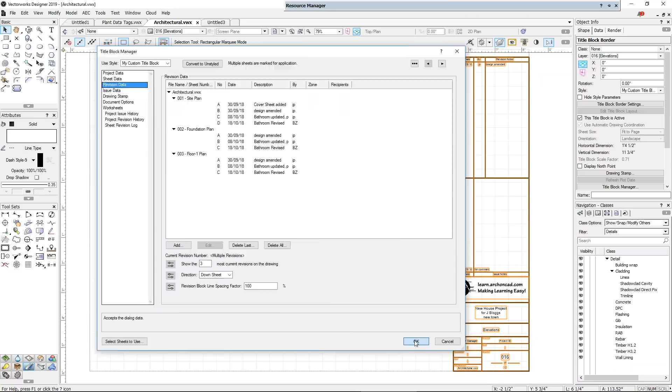It's affected my site plan, my plumbing and drainage, all the rest of it. So we go OK, and you notice it's just applied it to those 3 revisions, which is really, really easy to do now. I could apply revisions right across multiple drawings, multiple files if I wanted to. It is really, really quick to do.

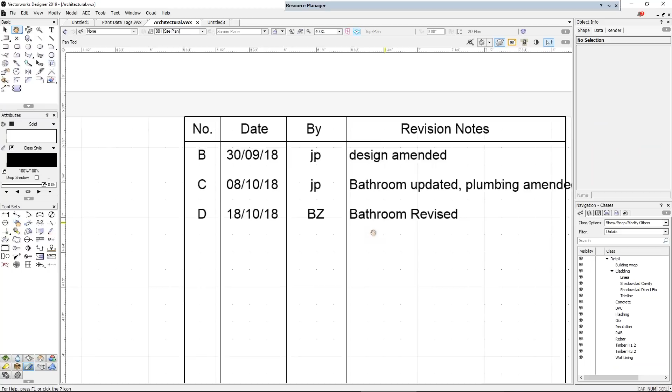Let's just go to our site plan, I'll show you. And there's Barbara's, there's today. Those of you who don't know, I'm in tomorrow. And there's my bathroom revised. And that is really, really quick.

So, Barbara, that's probably enough for today. We've covered quite a lot of ground.